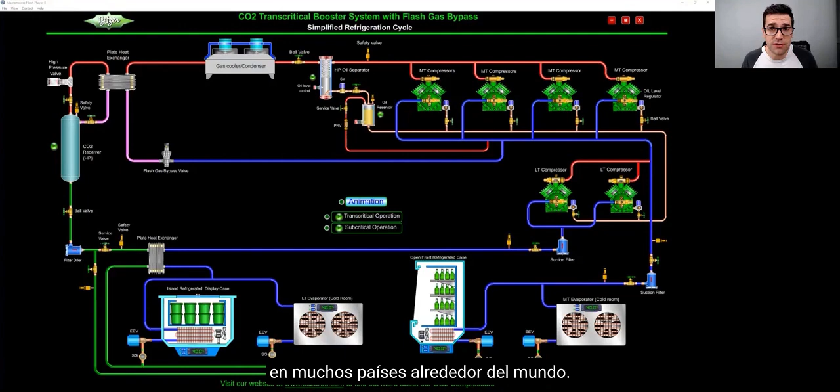I've been deep diving on CO2 refrigeration for 6, 7 years now, still learning it. I believe it's going to be the commercial refrigerant globally at some point. If you start learning it now, you're going to prepare yourself for the rules and regulations coming up in a lot of countries around the world, and you're going to see CO2 continue to grow in that space.

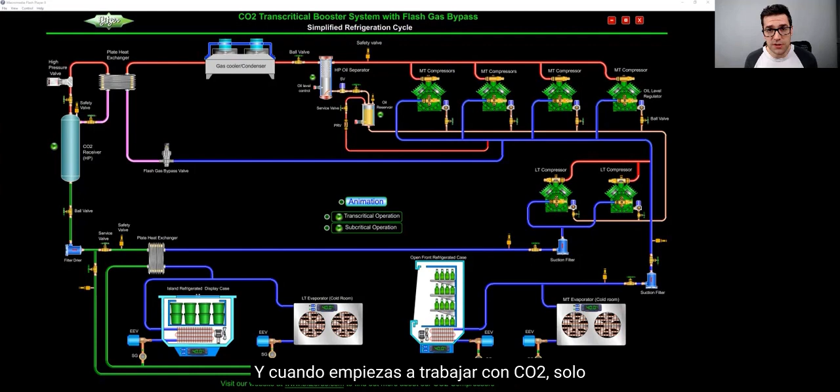I found this awesome diagram from Bitzer, this animation. I want to go through it with you to give you an idea of what a transcritical booster system is. When you start working on CO2, know that it's nothing to be afraid of. It is still a refrigerant, but it runs at higher pressure.

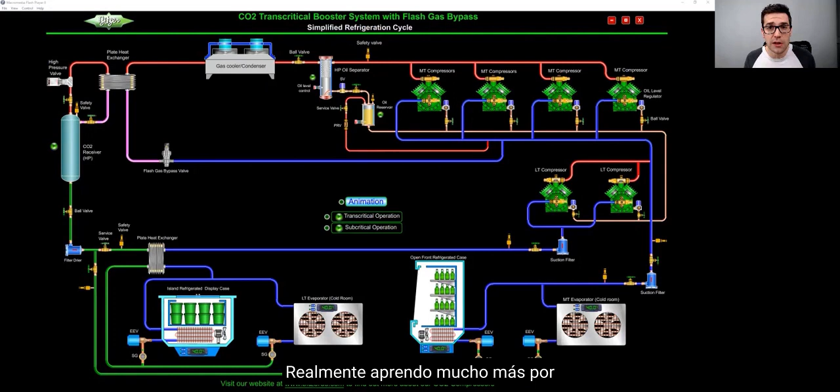There are some safety factors you need to really understand, but I really think this is a great diagram and animation that you could show other people, and I highly recommend that you do that. I learn a lot more by training others, by sharing my knowledge. I'll walk through this with you, and then I want you to walk through this with somebody else as well.

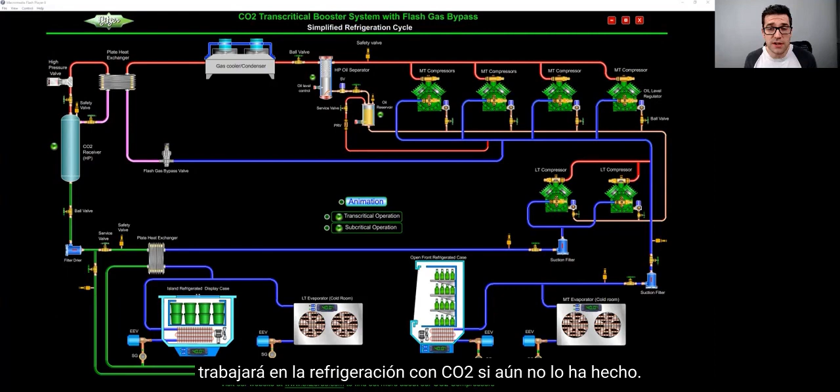Get yourself more familiar with a CO2 system because you will be working on CO2 refrigeration if you're not already. So as you can see up here are medium temp compressors. This is the discharge line. As it comes out of the discharge line, you have a safety valve, and then an oil separator.

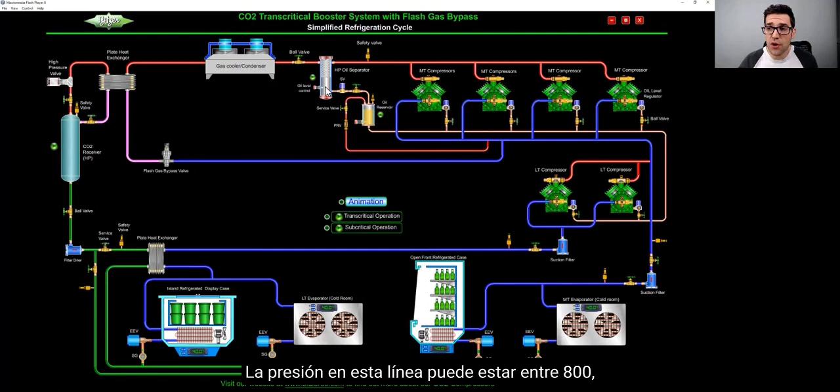There's a little plus sign here, you can open up and see inside the separator what is going on. What the separator does is separate the oil from the refrigerant. The pressure in this line can be anywhere between 800 psi all the way up to 1,500 psi.

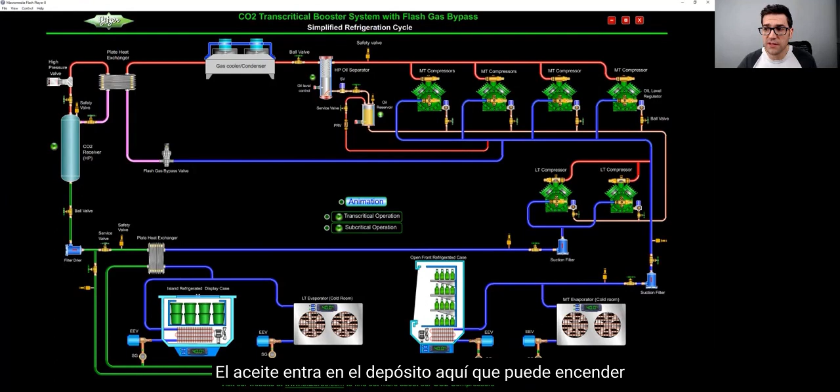Depending on the ambient temperature and the way you want to run it, because maybe you're doing heat reclaim or something, so you are running it in transcritical mode. The separator separates the oil, which goes into the reservoir here that you can turn on and turn off if you want to look at it, this little button. And then this goes back and feeds the oil regulators.

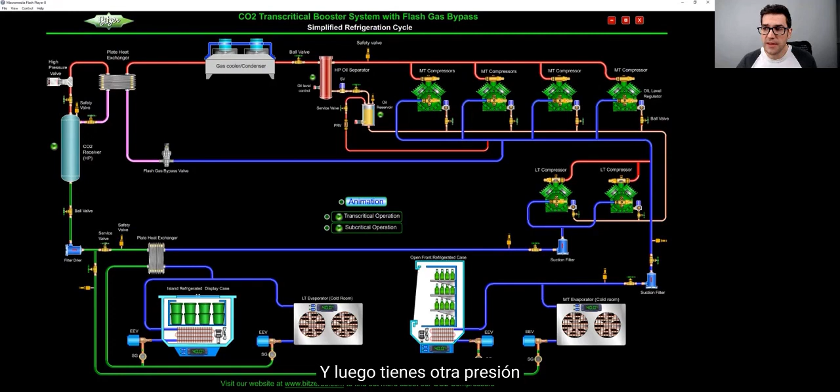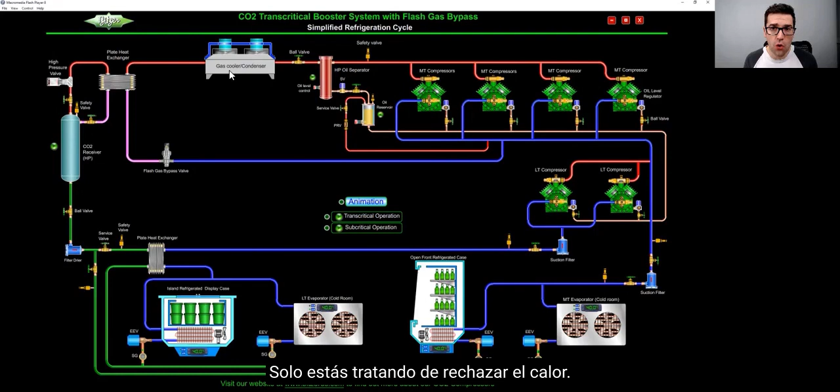From here, you're going to the gas cooler condenser. It's called a gas cooler condenser because when it's above 87.8 degrees or 31 degrees Celsius, it is not a condenser anymore, it's a gas cooler. You're only trying to reject heat, you're trying just to cool it down. That's why you call it a gas cooler.

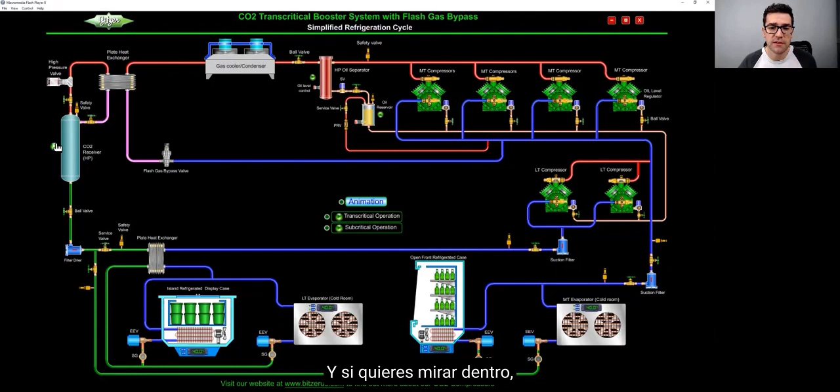From here, you're going into a plate heat exchanger, and then you go into what we call our high pressure valve right here. As you can see, this is a Danfoss high pressure valve. And then you go into your flash tank receiver, and if you want to look inside, you can look inside.

The other valve that works in combination with this high pressure valve is this flash gas bypass valve. What this valve does is maintain the receiver pressure, and this high pressure valve maintains the gas cooler condenser pressure. So just think of it like that: this high pressure valve is controlling the gas cooler condenser, and this flash gas bypass valve is controlling the flash tank receiver.

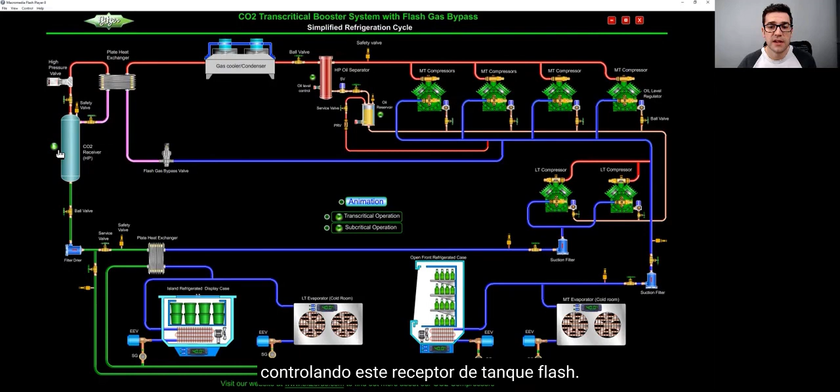So what it's doing is bypassing gas to make sure you have a good quality of liquid and good pressure liquid going to all your loads, all your cases, plate heat exchangers. So as you can see here, here's the liquid off the bottom of this receiver. It goes down into a filter drier, and then it starts to feed your different cases, both your medium and low temp cases, which is really cool, this liquid line.

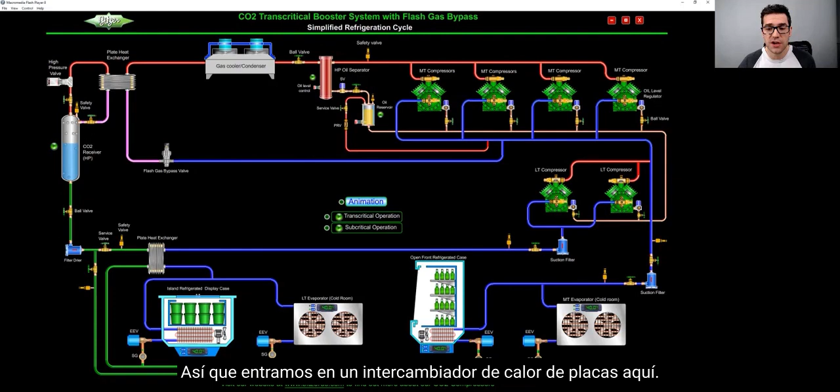So we go into a plate heat exchanger here, there's a safety valve there. You really got to remember, you never want to trap CO2. CO2 expands so fast, unbelievably fast, so you got to have a lot of safety valves, check valves around different things.

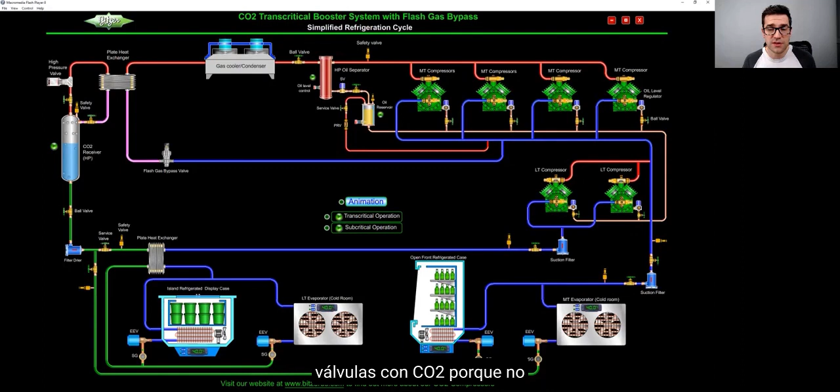So now we feed this plate heat exchanger, we'll go down through it, and then we'll feed into our electronic expansion valves, as you can see right here. These EEVs, you cannot use TX valves with CO2 because they do not react fast enough. You use electronic valves, and then you feed into the case.

If you want to change it to Fahrenheit, you can, or Celsius. Oh, I started the animation, I want to do that a little bit after. So now we feed this case.

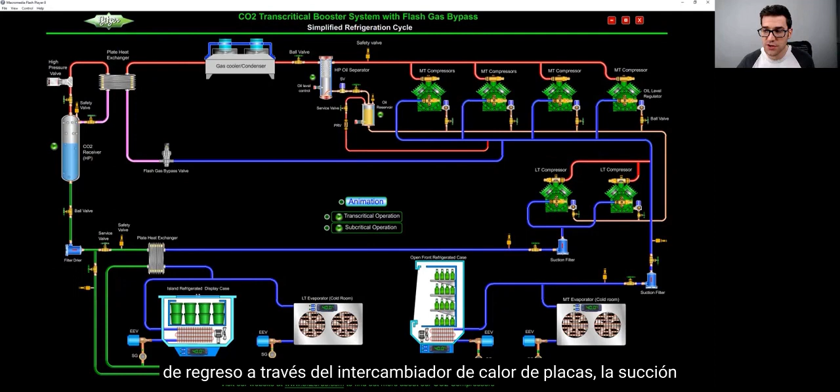So we're cooling this island refrigerated case, and then we go back through the plate heat exchanger, the suction line, back into the low temp compressor. Why is it designed this way? There's many different designs, so you've got to check out the manufacturer's design in the rack. But what this plate heat exchanger is for is really to increase the superheat.

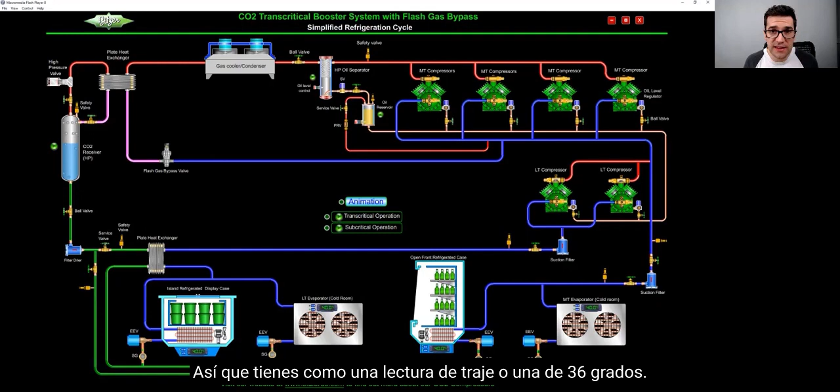So you have like a 20K, 25K superheat, or a 36 degree or 45 degree superheat for these low temp compressors, because that CO2, the way it mixes with the oil, when you're below that for your low temp compressors, the oil is saturated and it's really soluble with that CO2.

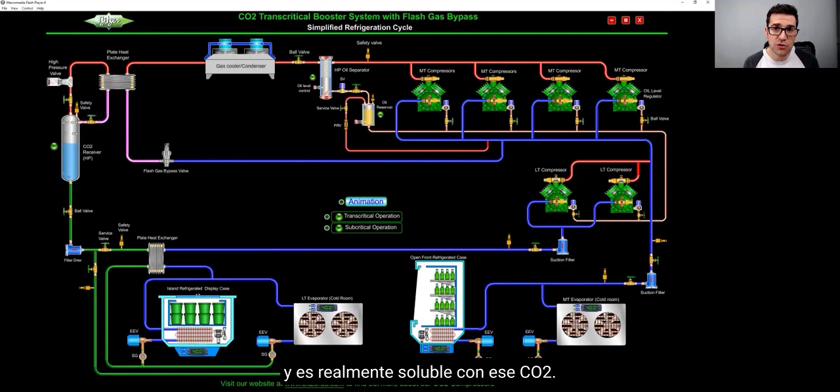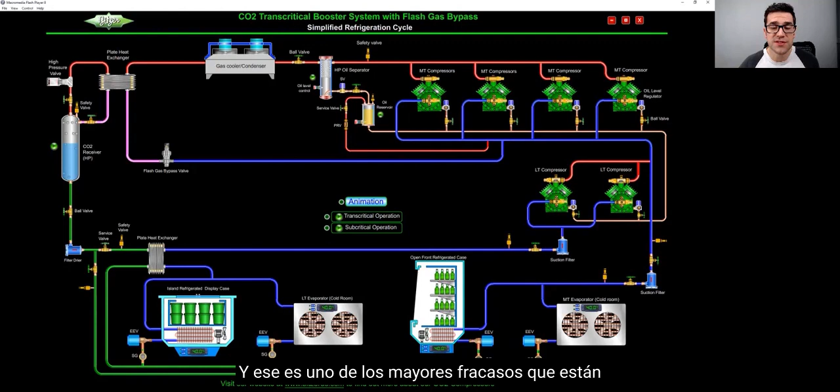And what happens, it starts to flood back, even though you have, say, 10 degrees superheat at that compressor, or 5 or 6K. That's not enough superheat, because at that point the oil is going to be full of CO2, and it's going to start wearing the bearings. That's one of the biggest failures they're seeing with CO2 and the compressor manufacturers - low superheat or flood back - even though you need to maintain that 20K, 25K, or 36, 40 degree Fahrenheit.

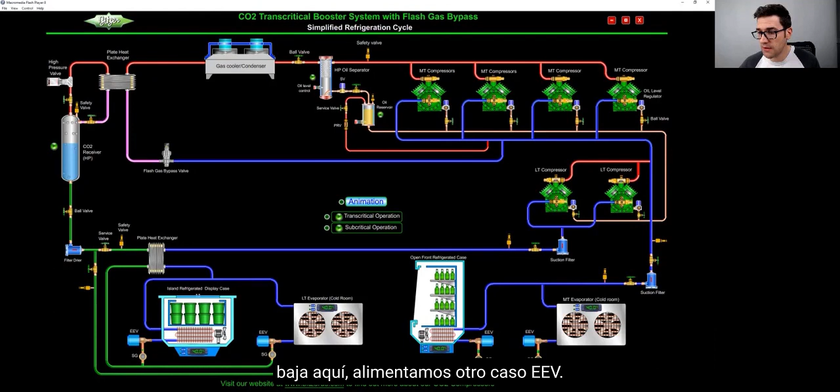And then we go back to the low temp compressors. You can also see right here, as we go down, we feed another case EEV. These are the medium temp evaporators - the other ones were low temp, sorry. And then still EEVs, you've got sight glasses there. And then now we go into a suction filter, and then back to the medium temp.

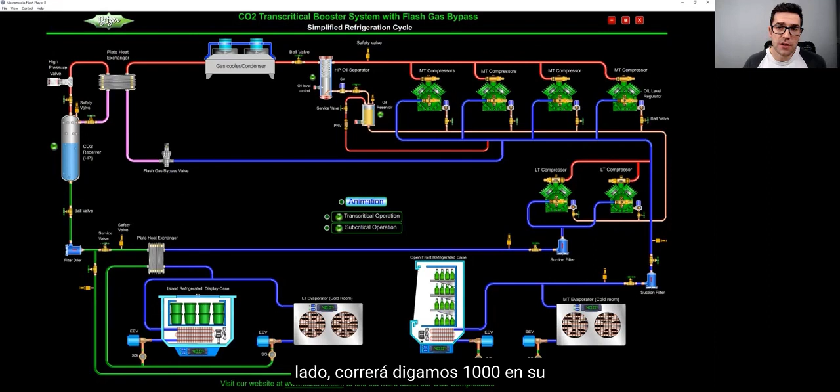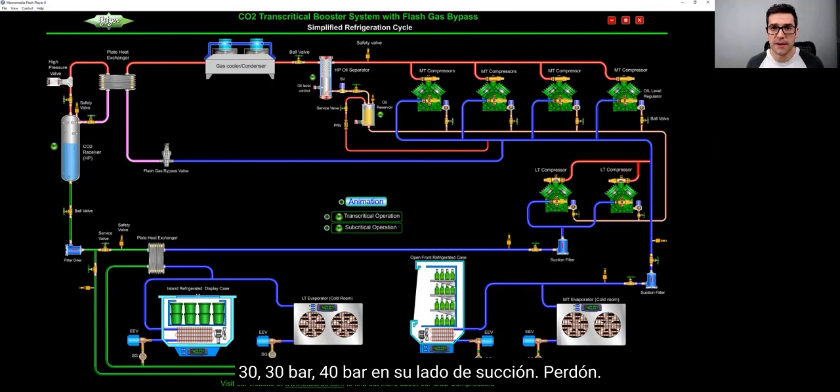So on the transcritical medium temp side, you'll be running, say, 1,000 on your discharge, 450, 500 on your suction. In bar, you'll be running at, say, 90, 100 bar. And on your low side, you'll be running, say, 30 bar, 40 bar on your suction side, sorry. And for your low temp, you'll be running around 450, 500 PSI, and probably 200, 220 PSI suction.

That's around minus 20 Fahrenheit. And that's kind of the way it works. I'm going to show the animation on right now.

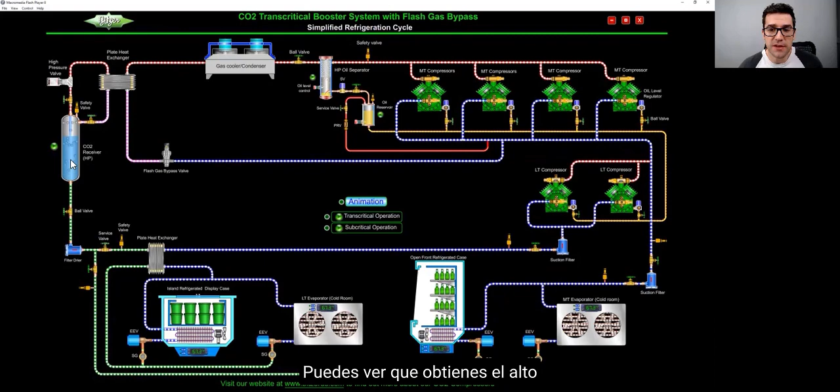So here's the animation. As you can see here, it's discharging out to the gas cooler. You can see the high pressure valve here, opening and closing, controlling the gas cooler - flash gas, high pressure valve. And like I said, you get this flash gas bypass valve controlling the receiver here.

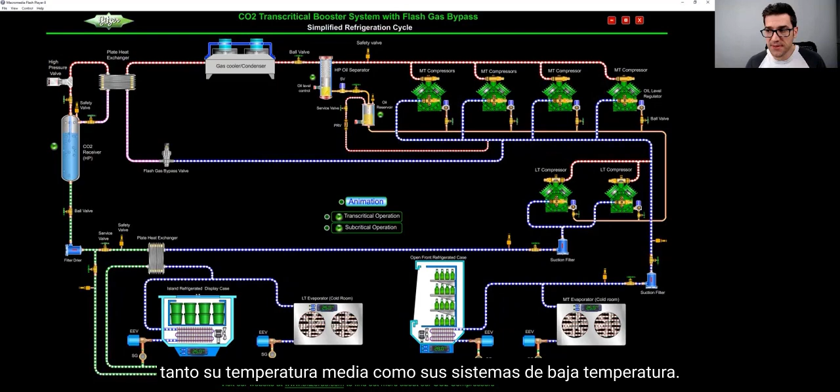And then, as you can see, your liquid feeds both your medium temp and your low temp systems. What's cool about this, I didn't mention, on the low temp side, you can see the discharge goes into the suction. So there's going to be many different designs - this could discharge into the receiver, depending on the type of design.

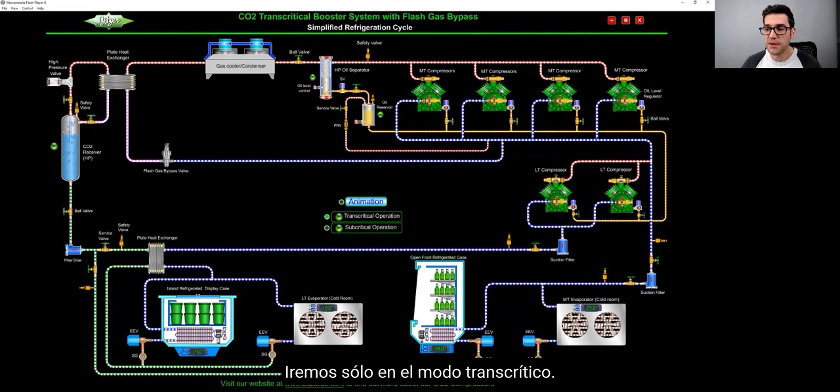We'll go just into transcritical mode, and then you can go to subcritical, so you don't have all the medium temp compressors running.

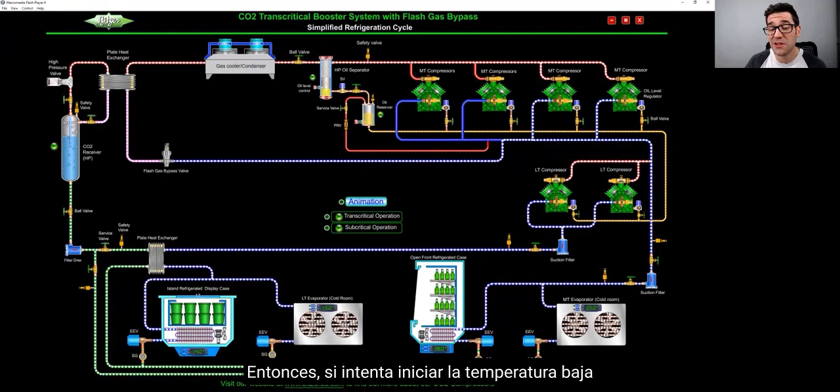One thing you need to be aware of: you cannot run your low temp compressors without the medium temp. As you can see, the discharge of the low temp is pumping right into the medium temp. So if you try to start the low temp, or you shut the medium temp circuits off - the transcritical circuits - you're probably going to blow a disc. So just be aware of that.

So I think this is a really cool diagram to take a look at, just a basic transcritical booster system. I'd love to hear your thoughts.